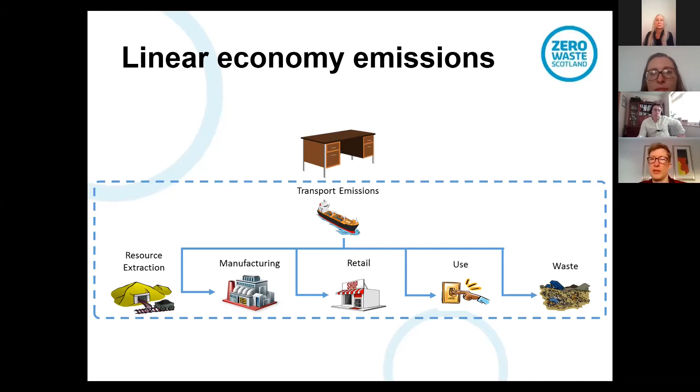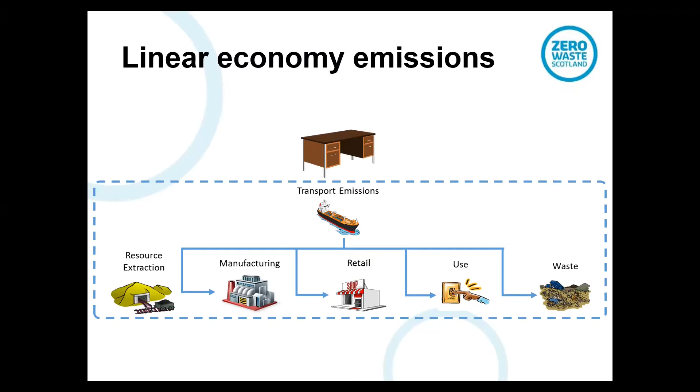When you include the embodied emissions of these products, what we find is their carbon footprint gets much, much bigger. And that's problematic.

In the context of why we're looking at the construction sector, the construction sector accounts for 50% of the UK's resource use, and it's about the same for Scotland, and 40% of the country's total emissions when you consider these wider embodied carbon emissions.

And then at a national scale in Scotland, around 50% of our waste on an annual basis comes from the construction sector. While a large proportion of that is classed as recycled, if that doesn't need to happen in the first place, then we're procuring a lot of materials we don't need to. So there's a lot of money being wasted there as well.

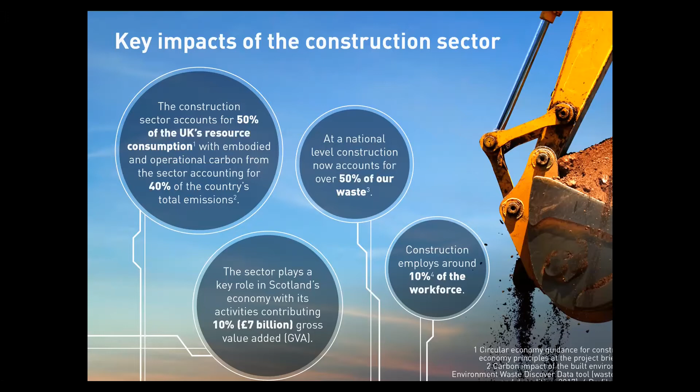And this is an industry that accounts for about 10% of our GVA in Scotland, and about the same for GDP, and about 1 in 10 people work in it. So it's a hugely important sector, both environmentally and socioeconomically.

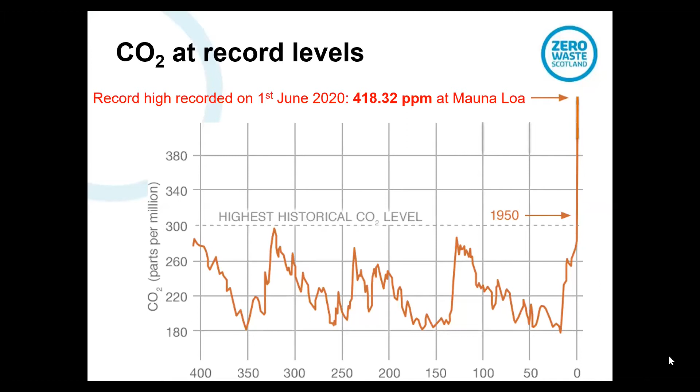It's increasingly having an impact on not only the environment, our built environment, but the environment that we get materials from. And this is also impacting the cost and the volatility of how much things cost.

I said earlier that around 50% of the materials that we use go into the built environment, and actually around 70% of those are imported from Europe or the rest of the world. So this dependency, both from small businesses and large ones, on a global supply chain, is really unsustainable, and it puts us at risk. The circular economy is one of these things that we can use to insulate ourselves against that risk.

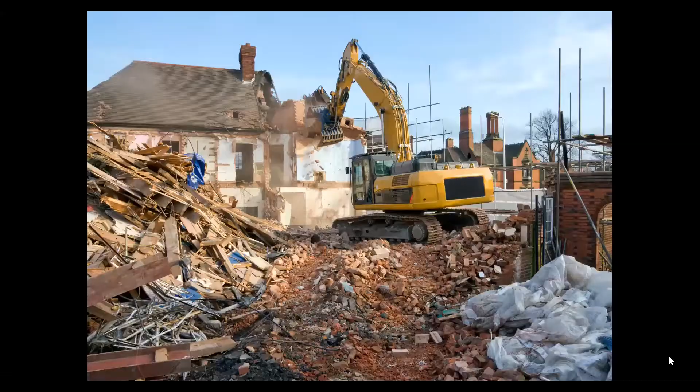But the current model, the way things are built and designed, the way things end up as waste at the end of their life, you can see here this is the same applies for buildings. So at the end of their lives, basically the best thing that we can do with them within the short timeframes we have is to demolish them.

And you can see that almost everything that comes out of this process is damaged and therefore devalued. As a result of having the value stripped away from it, there's not much you can do with it. Best case, the wood might be chipped and burned, metals may be stripped out, bricks, if they don't end up as landfill, might be crushed and used as secondary aggregate, which is good.

I should note that this might get used for capping of landfill or backfilling of quarries, which counts as recycling, but it's really downcycling.

So the circular economy represents this way of combating this, where we design things so that they can be readily repaired, reused and refurbished. And we're really curbing those long supply chains so that the economy becomes circular, and that we can capture that value that's currently hemorrhaging out of it.

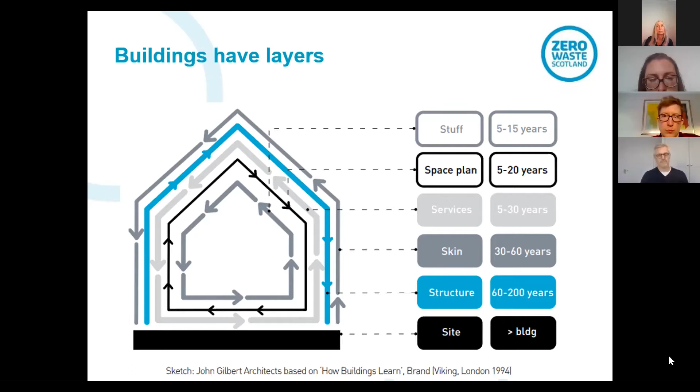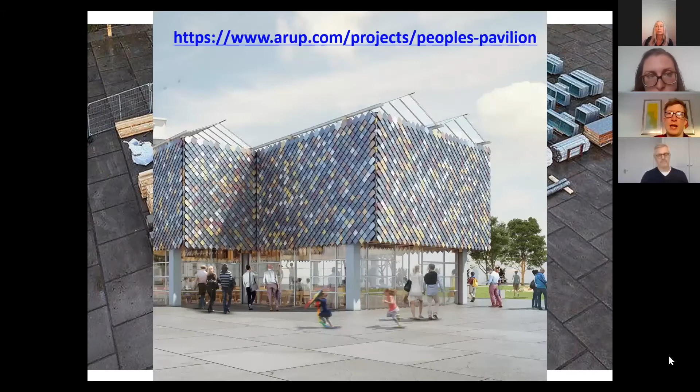So what stage is this project at? Is it the end or the beginning? The idea is that it's both - you can create buildings with demountable fixtures and fittings, not using nails, glues, adhesives, or bonds. This is the People's Pavilion, built exactly that way, so it's fully demountable. I believe there's lots of materials here that are borrowed and also tagged, taking advantage of things like materials passports, attaching data to each material so that at the end of its life, like in the building in layers approach, you can not only take the materials out but get precise data on their specifications, when they were installed, what they're made of. That creates value that might normally be lost in buildings where that's not available.

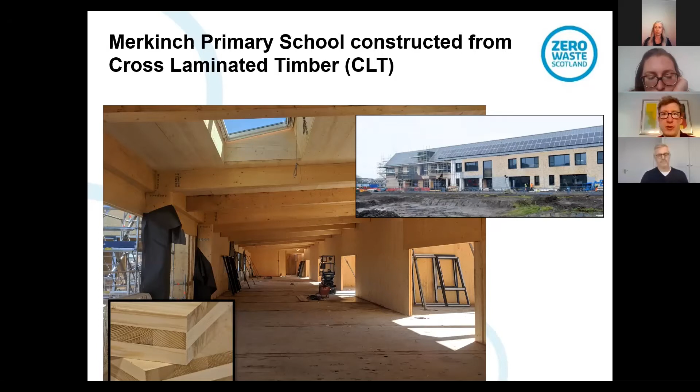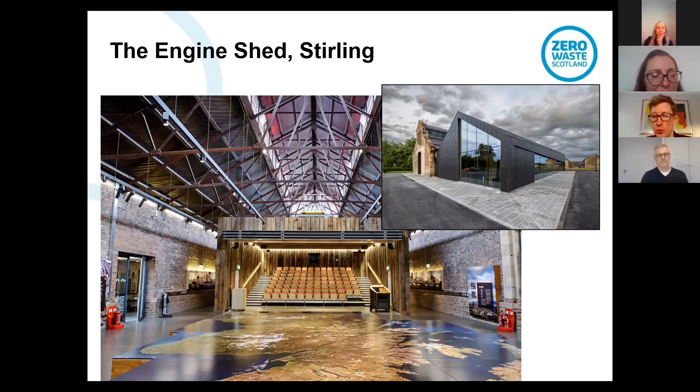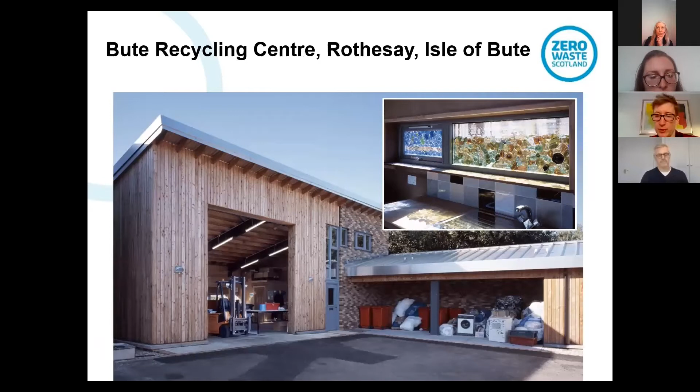These are other examples of circularity in the Scottish built environment. This is a structure on Bute, which is fully recycled materials. And we also have another example of the Ripple Retreat near Loch Lomond. So you can look at all of these.

There's a few more examples, and I've outlined the benefits here, which are sort of intuitive. You probably understand a lot of these, but it's all there for you to go over. I'm also happy to open the floor to any questions at the end about the application of these principles. I'll stop there.

That's fantastic. Thank you very, very much, Nick. Thank you. And I always love seeing the pictures from the buildings you show. They just look beautiful, absolutely stunning. And hearing that they're built with circular economy practices makes them even more special.

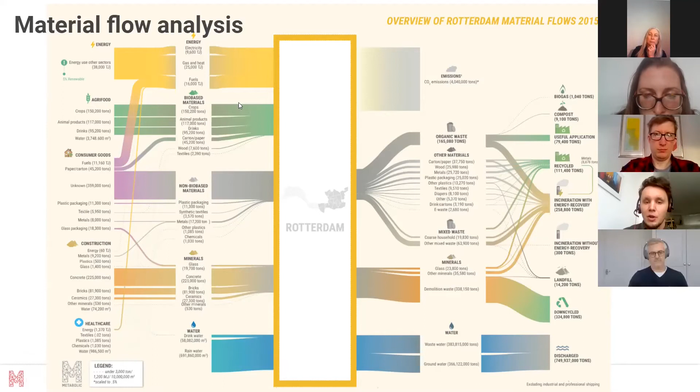The end goal of this first stage of the circular scan is to get a good understanding of what will be the hotspots and opportunities. As we know, construction as a sector is always one of the highest impact sectors. Although the numbers aren't there yet, we know this is going to be one of the hotspots and opportunities.

So what can we help each other with? We will be doing this study, and I think we'll also be reaching out to some of you to get better insight. At the moment, we're approaching all the waste management companies in the region to get a good overview of all the waste they're processing and how it's treated - to get a good overview, but also good insight into regional opportunities. We see this as a first scan, a first map on which we can identify the best opportunities.

You guys know much better what's happening in the region and what kind of regional opportunities in the Perth and Kinross region would be of particular interest. That can be wood or CLT building, concrete recycling or circular concrete plants, urban mining, or more on the digital side, as Nick was alluding to, BIM models. These are the insights and hotspots we want to identify in this project.

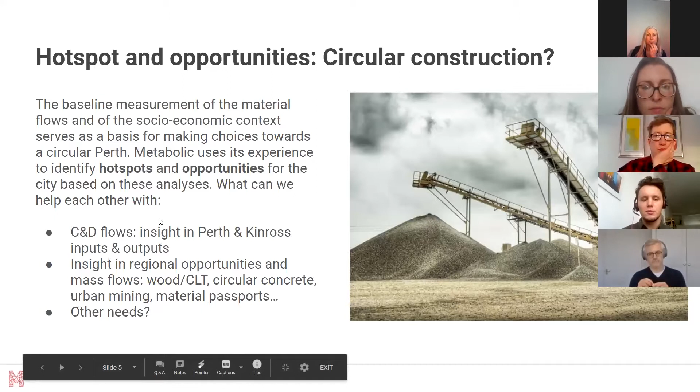That was me for short. If there's anything, always feel free to reach out, because I think the best opportunities and the best data always arise from having contact with the main stakeholders in the region. So, happy to share and talk further.

So just to give you some information on the pallet specification - I don't know if you want to cover this, Nathan, because you've been involved in some of the testing on this. I don't profess to be as technical as Paul and the guys, and our operations guy Steve Ottaway, who had a previous background in CHEP, if anyone knows the blue pallet business which is FMCG focused. But those guys have worked tirelessly in designing a suite of, I'd say, up to 6 pallets.

This is an example here of the 1200 by 1000 two-way entry pallet. Don't take our word for it, I think is the catchphrase here, because we then sent them to Virginia Tech, a testing facility in Virginia, where those pallets now carry an accreditation, which is a world first.

The HIABs are incredibly capable, but the pallet underneath had never been tested. So we sent away the pallets and continue to send them away as new specifications are drawn up. But I think the bottom line is that what we've managed to do is create a pallet that is widely used across the entire sector.

At the moment, there are various iterations, but that size and specification will absorb a huge amount of the material goods being sent by manufacturers. It's considerably safer by design and more robust, and what that means is it no longer has that single trip status. At the end of its lifespan, we can repatriate, we can repair, and we can reissue.

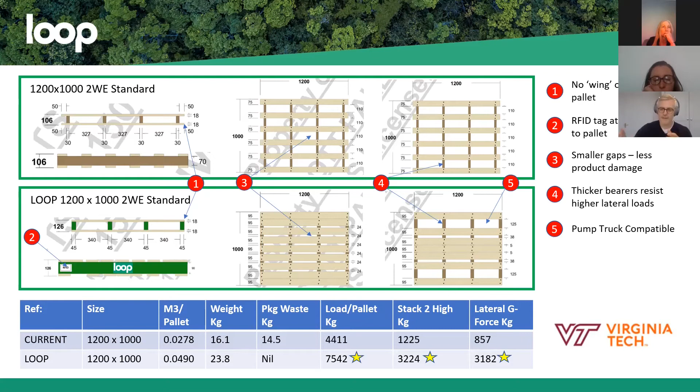Because it's more about health and safety, sustainability, their CSR and similar. But nonetheless, the reality is that the accountants and the commercial guys in all of these businesses will have an eye on the numbers. But the numbers work in favour of every person within that supply chain, because even when you get down to the builders and the tier 2 users, the reality is that there is a cost associated with managing your waste stream.

Unfortunately, what would often happen is skips would be called in because there would be accumulation of pallets, and they would just be thrown in rather ad hoc at sort of £250 a unit or whatever a skip may cost at the moment - I think that's a fairly rounded figure. So the pallet design, there's a lot of integrity gone into that to ensure our model stands up to that reuse application.

So yeah, just to give you some of the benefits of pallet loop - obviously we're trying to make it as green as possible. The actual CO2 emissions of moving those pallets around, and that's just the pallets, not the materials, I must stress, is up to 70% less, because we're able to recover that pallet, and then that pallet is kept more local for its reuse phase.

So generally, the vast majority of the timber that goes into these pallets is sourced in Scotland. But obviously that material gets moved down to a lot of places around the country, and each time we send a new pallet down, that's quite a few road miles. So by keeping those pallets more local, we can reduce those CO2 emissions.

Any remaining CO2 emissions we're going to offset, and I'll touch on that in a second. But we're looking at probably a 75% reduction in timber usage at least - it depends how much reuse we can get out of the pallets. Obviously there will be repairs that need to be made, but we're looking at a significant saving in timber use. All that timber will be responsibly sourced, and for UK sources it's generally going to be FSC certified. And like I say, we get that 100% reduction in waste.

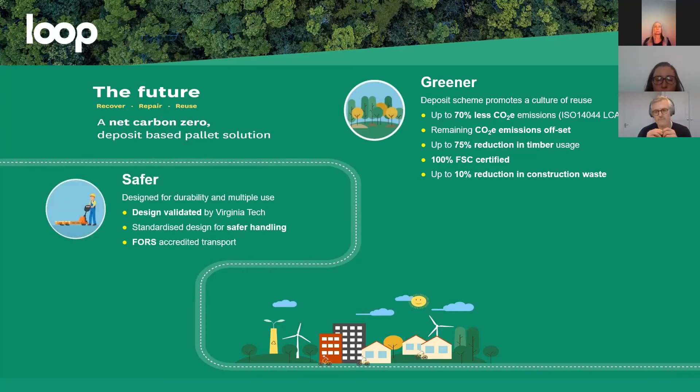You've obviously got the safety side, which Nathan's discussed there around - the design is validated by Virginia Tech, so it's got safer handling. But in addition, we're looking at FORS accredited transport for deliveries to sites. So the actual vehicles that are delivering these pallets or collecting the pallets, moreover, will be FORS accredited. And obviously then you've got that leaner supply chain, as because you've got that unified pallet design, you can maximize that distribution capacity around the country.

We are looking at RFID tagged technology - we will be putting this on the pallets. It's in its infancy; some of this technology at the moment is very local, but there's new RFID tag readers that can read it from a further distance away, which will help with distribution and information.

And obviously, one of the key things we're offering is that fast and efficient site collection. There are some collection services at the moment, but you can wait 3 or 4 weeks for a collection. We're guaranteeing that we'll collect the pallets from construction sites within 72 hours, which is a key driver for the contractors.

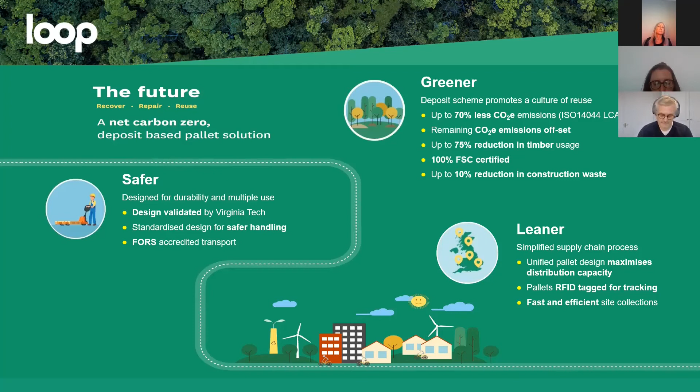On the carbon balance, we're looking at operating a carbon neutral business. So we've done an LCA on the pallets as they are at the moment. Obviously these will need to be updated as we launch the pallet and get real world data. But we're estimating at the moment that each trip of a loop pallet is around 2 kilograms of CO2 equivalent, assuming an 80% return rate. That excludes the manufacturer's materials being moved around - that's us delivering the pallet to our manufacturer partner and collecting it from distribution centres, merchants, or construction sites. So that's what we've included in that LCA.

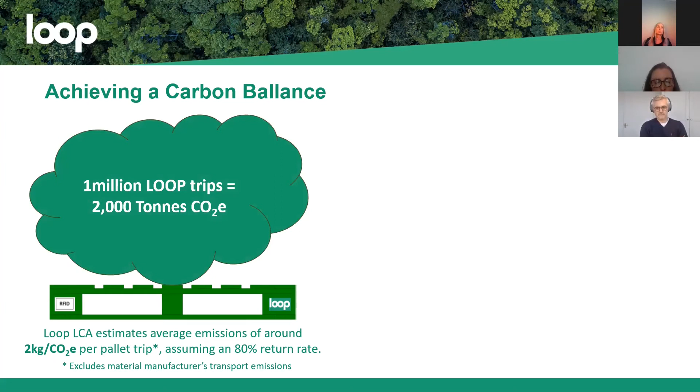Taking 1 million loop trips, that works out to around 2,000 tonnes of CO2. The way we're looking to offset that is we're working with an organisation called the Forest Canopy Foundation, which is a cooperative of forest management companies around the UK. For every million trips on a loop pallet, we'll be planting around 12 hectares of forest and managing that for 25 years. So we're not just putting trees in the ground, we're paying towards the management of that forest, to a point where there's an income stream for the owner of that forest.

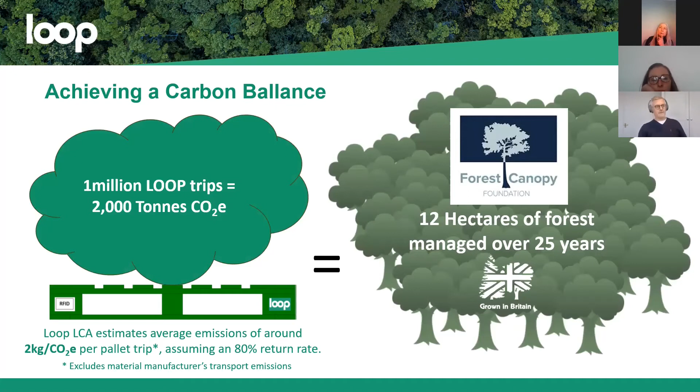So that's how we're working with Forest Canopy Foundation, and it's assessed by Grown in Britain. And just to finish off, to show you some of the endorsements - we've been discussing this with a number of contractors. We've got written endorsements here: Kier, Bouygues, ISG, Costain, Multiplex, BAM.

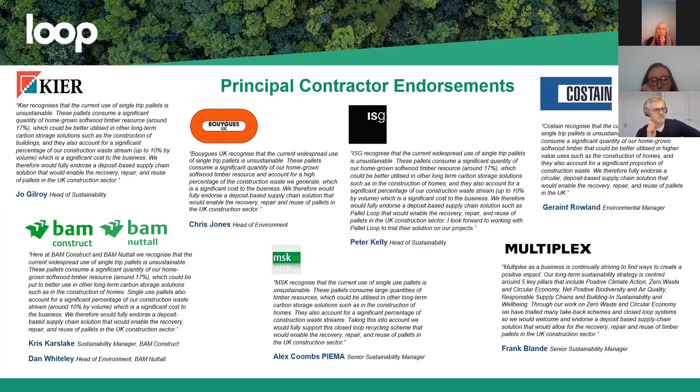But we've spoken to near enough all of the top 20 contractors around the country, including Balfour, BT, Willmott Dixon, and others. All of those have been really supportive and want to work with us to see how this can be taken forward. In addition, we've got the main builders merchants on board, such as Travis Perkins, and we're also talking to others - we mentioned Virginia Tech earlier, but we're also working with Loughborough University. We've had discussions with Cambridge, and obviously Nick at Zero Waste Scotland. So really good support - everyone we spoke to has been really positive. There's been some challenging questions, but in the main, very good support for this initiative.

So I think, just to leave it there, I think the only question is: are you in the loop? That's how we like to leave it.

Couldn't resist. Thanks, Charlie. Thank you very much, Charlie and Nathan. That was fantastic - really, really great business model. Really, really innovative, and exactly what we're looking for with many of the products of the companies we're working with - just a way to return them, be profitable without having profits linked to virgin resource extraction or waste creation.

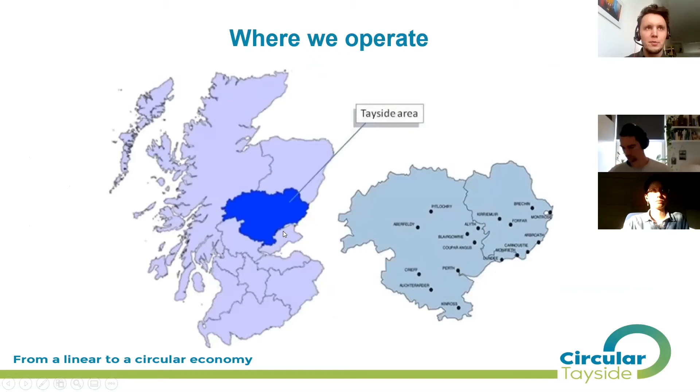So I joined the team in 2019, and we are operating in all this area. We used to travel in all this area, but since COVID, we obviously do our meetings and events online. And what do we do?

We try to help local organizations transition towards circularity by using two approaches. The first one is by raising awareness on circular economy - this event is part of that - and also by helping organizations access Zero Waste Scotland support. So how do we raise awareness? We have a series of events throughout the year.

We have had events on food waste, agri-waste, furniture, construction, pretty much anything you can think of. And we're always happy to have events that are themed or focused on other themes, so if you have any ideas, just get in touch.

Also, since the beginning of the lockdown, we have started recording our events, so you can find past events on our page. We also have our Be Inspired page, where we add local organizations that have circular elements in their product or operations, ranging from micro enterprises all the way to bigger enterprises like Fairmont Hotel and Bonar Yarns and other bigger manufacturers. So if you have any circular elements, just get in touch and we will be very happy to add you to our Be Inspired page, but also on our Circular Tayside map.